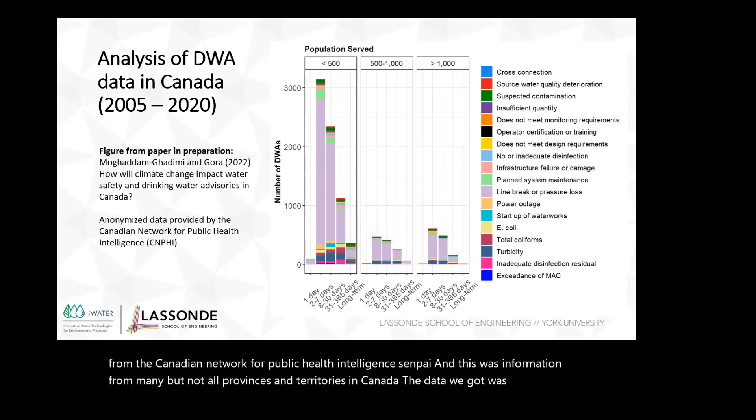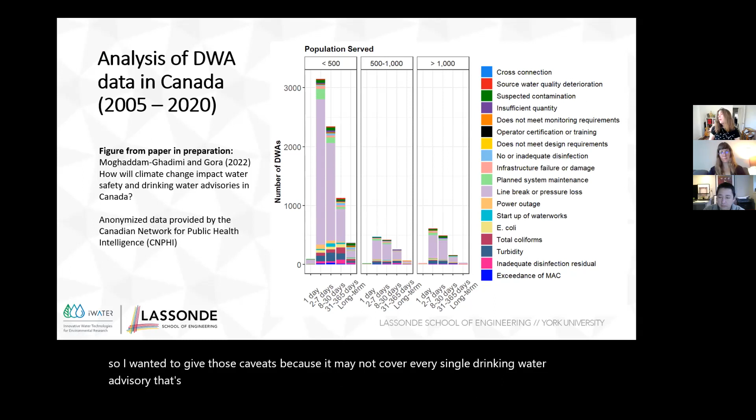So one of my students is working right now on a paper all about the different causes of boil water advisories in Canada. So we got some information from the Canadian Network for Public Health Intelligence, CNPHI, and this was information from many, but not all, provinces and territories in Canada. The data we got was anonymized, which means we don't actually know exactly what community it came from or even what region. So I wanted to give those caveats because it may not cover every single drinking water advisory in Canada. That said, we were able to find some really interesting trends.

So this complicated graph shows a few things. We've got a couple of different population ranges. We've got under 500, so very small. We have 500 to 1,000, which is still pretty small, and then greater than 1,000. And the reason we did this kind of breakdown at the bottom end is because we already knew that most drinking water advisories happen in small communities. We also broke it down along the x-axis here. We're looking at the length of the boil water advisories, right?

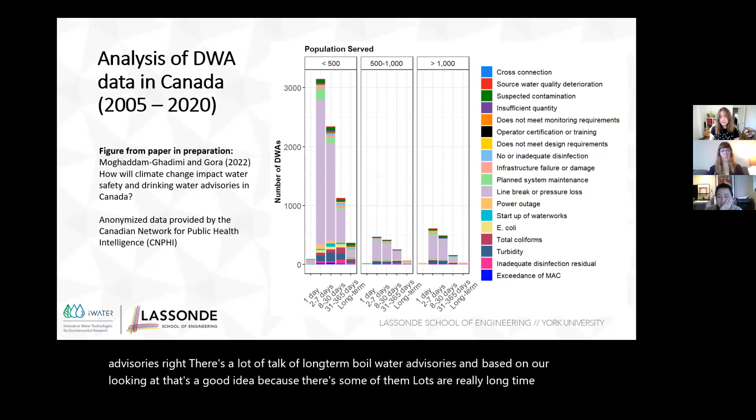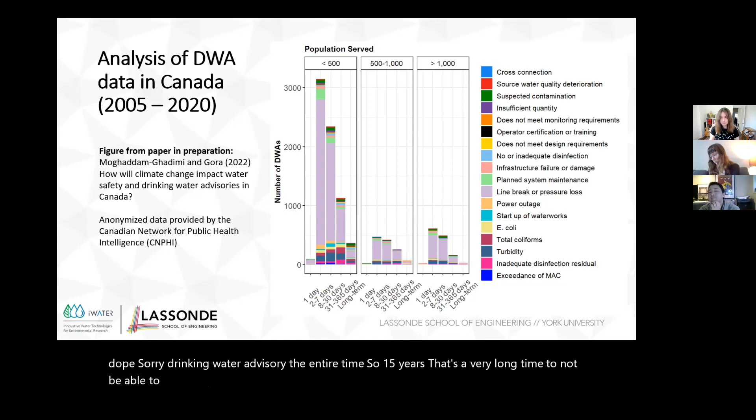There's a lot of talk of long-term boil water advisories, and based on our looking at it, that's a good idea because some of them last a really long time. We had a 15-year data set. We had some communities that were on a drinking water advisory the entire time. So 15 years, that's a very long time to not be able to drink your water without further treatment. Most of them, though, were somewhere between a week and a month, which is still incredibly long, especially if you've got children at home or if you're running a business. This is hugely disruptive.

So another thing that really stands out is if you look at this purple section here on these stacked bar graphs, this means line break or pressure loss. There are a couple of different reasons that can underlie that, but the main takeaway is that this is actually a distribution system issue. So it's not that there aren't boil water advisories related to bacteria being detected in the water. It's not that it's not because of operator training, because there certainly are a lot that are related to that. But a lot of what we're seeing is related to the distribution system infrastructure.

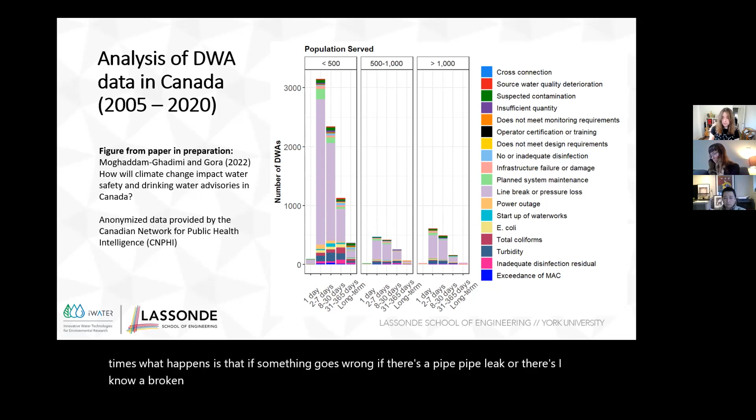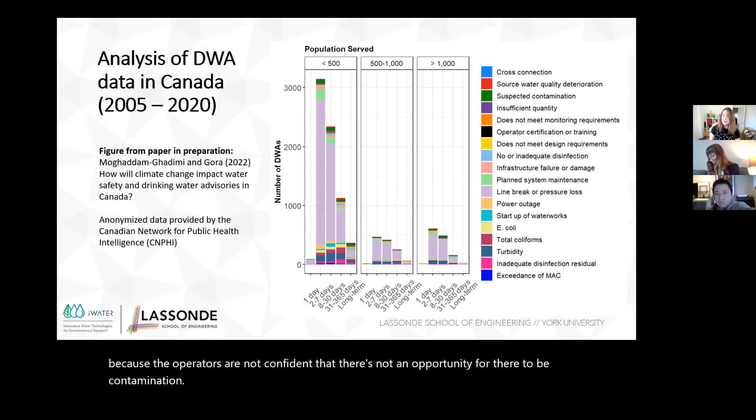And a lot of times what happens is that if something goes wrong, like if there's a pipe leak or there's a broken pipe, they'll put on a precautionary boil water advisory. So people are told to boil the water because the operators are not confident that there's not an opportunity for there to be contamination. This is useful information because if we really want to deal with what's happening here, if we really want to minimize the number of drinking water advisories, we need to know what is causing them.

So similarly, oh, no, I didn't put it up, sorry. Forgive me, I had another slide, but I didn't want to get too long.

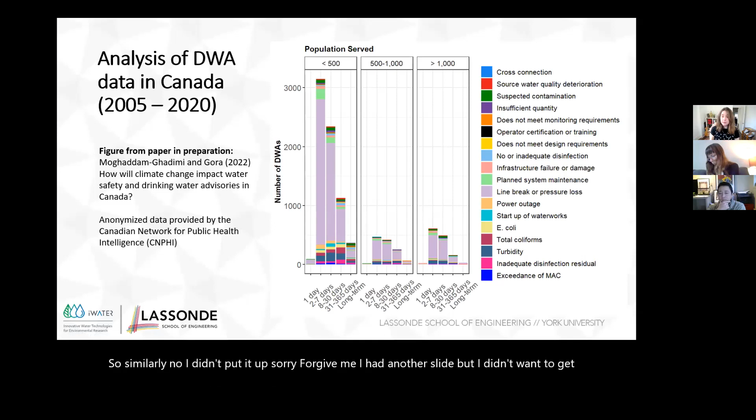We also looked at repeat boil water advisories and we had a very similar pattern. So again, issues in the distribution system were the main cause of drinking water advisories being called. And in most cases, those were precautionary, which means that it's not that something had been detected in the water, but that there was a risk of there being something detected in the water.

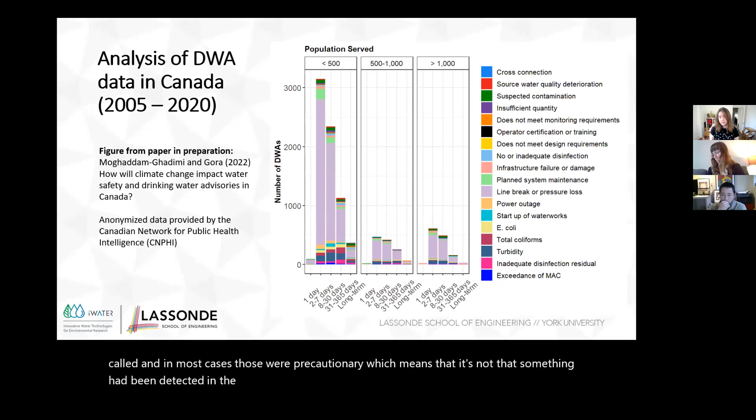Okay, so with that in mind, I want to tell you about two projects that I've worked on in the past and kind of how I went from somebody who didn't know a lot about drinking water in small communities. I'm from Hamilton, Ontario, which is about 500,000 people. So this is not something that was in my own personal background, but I've done a lot of work since I started as an engineer in these kinds of communities. And I think when I first started, all I saw were the challenges, but as time went on, I started to see the opportunities for innovation.

So the first one, when I worked in industry for 3 years a while ago, a lot of my work was related to small communities in Newfoundland and Labrador. So if you're not from Canada or you're not super familiar with Canada, Newfoundland and Labrador is our easternmost province. It has one of the smallest populations in Canada, and it's very rural.

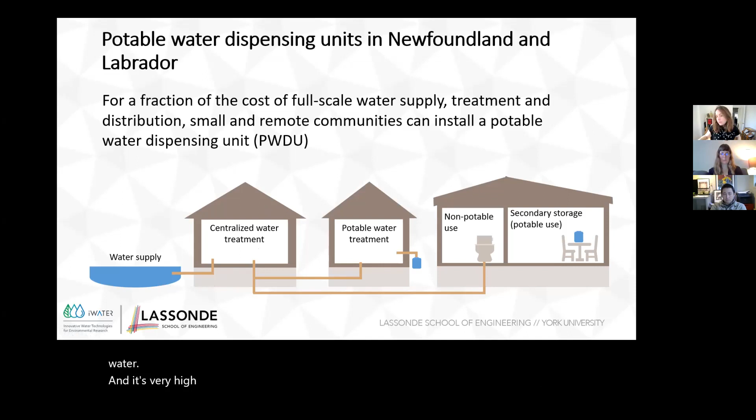I was lucky enough to work on this project throughout my time in industry. So it's one of the first things I did, and some of the follow-up projects were some of the last things I did while I was there. So what was neat about this is that it wasn't an idea that was imposed from above. This is something that came from the communities themselves, or at least a subset of them. So 7 communities built their own potable water dispensing units, usually at things like the town hall.

3 of them had ozonation for their treatment, and 4 of them used reverse osmosis membranes. The aesthetic water quality improved, so that there was no more taste or smell of chlorine. The types of treatments used meant that there was much less color in the water. So the aesthetic quality was much higher. We did a study looking at all 7 of these. We went to sample the water and to talk to people and figure out how people were using it.

And we found that the aesthetic water quality was a huge predictor of whether or not people would actually use this thing, which is, again, not too surprising. Aesthetic water quality is what gives all of us as users an indication as to whether or not the water is safe, right? We also found that what we called the quality of the dispensing experience was a huge predictor of whether or not people would use it.

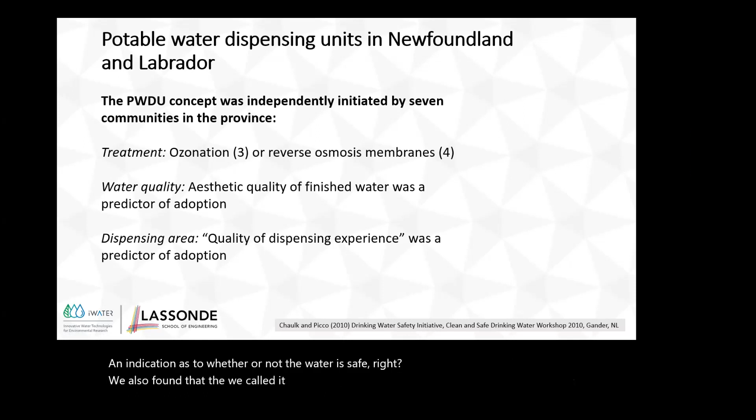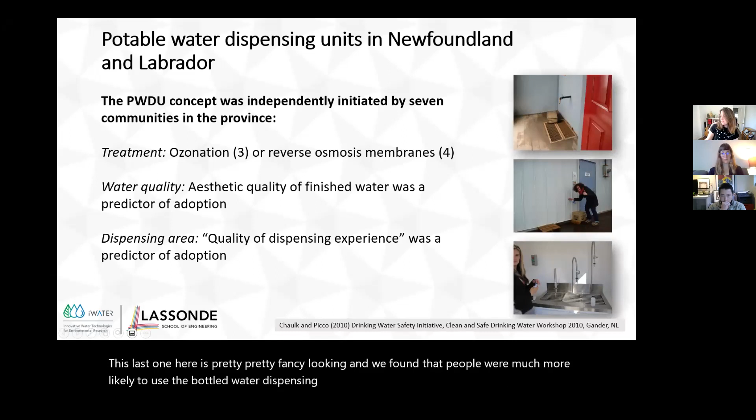So when I talk about innovation, we saw these things. It came from the ground up. And we were tasked as an engineering firm with designing something that would take into account what's already been done before in these 7 communities, and how could we improve it, standardize it so that it could be scaled up to many more communities in the province.

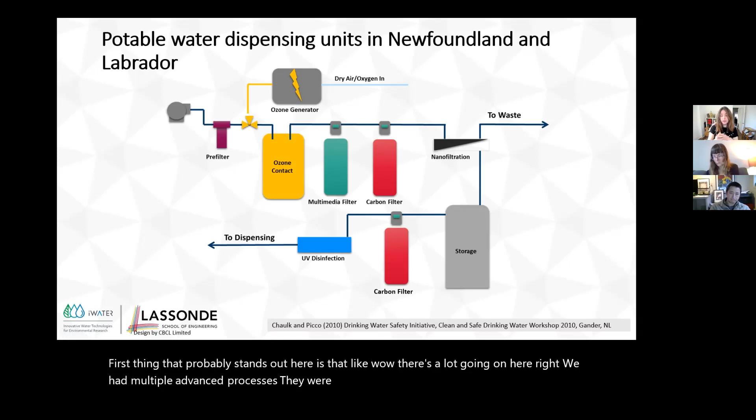So I won't go through this in too much detail, but it does show you the main components of this process. We have ozone, we have activated carbon, we have nanofiltration, we have UV. First thing that probably stands out here is that, wow, there's a lot going on here, right? We had multiple advanced processes. They were very small, which helped on the energy and chemical side, but still we had a lot going on. The goal here was that if one of these things broke down, it would still be possible.

There was kind of a natural redundancy built in so that the other stuff would keep working and still provide safe water. Two other things: we had this storage. We sized the storage so there would be at least 5 liters per person per day for the community.

And the UV disinfection: when the water came in, it would have had chlorine in it, but through all these different stages, it would have been removed, especially through the GAC. But we did provide UV disinfection right at the outlet. So after it came out of storage, right when someone's dispensing the water, it would go through a UV unit.

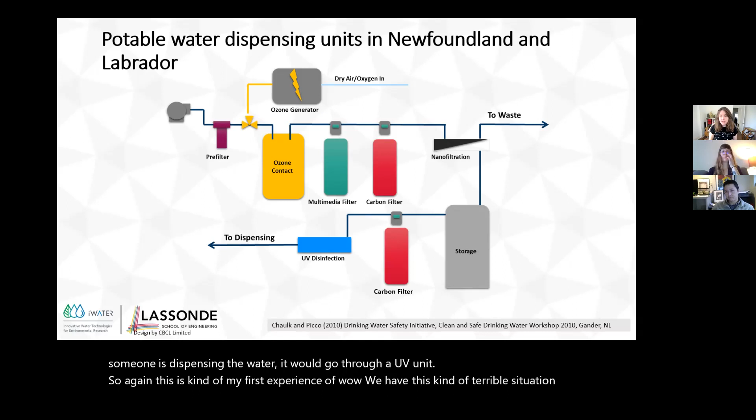So again, this is kind of my first experience of, wow, we have this kind of terrible situation. But the solution is kind of outside the box, right? Or I guess we're making a new box, but it's not what you'd expect, right? And that's kind of cool.

I don't want to say there's freedom, because that implies that maybe we're going to play fast and loose with water safety, and that's not really what it is. It's just that you might need to look outside the usual solutions, and there's maybe a certain kind of openness to trying new things that will work at the small scale.

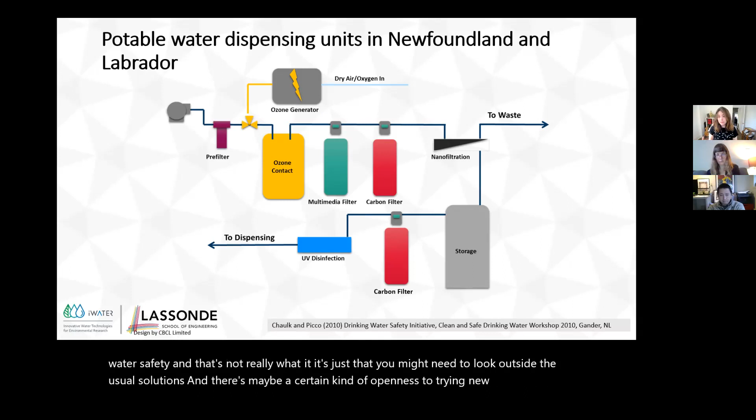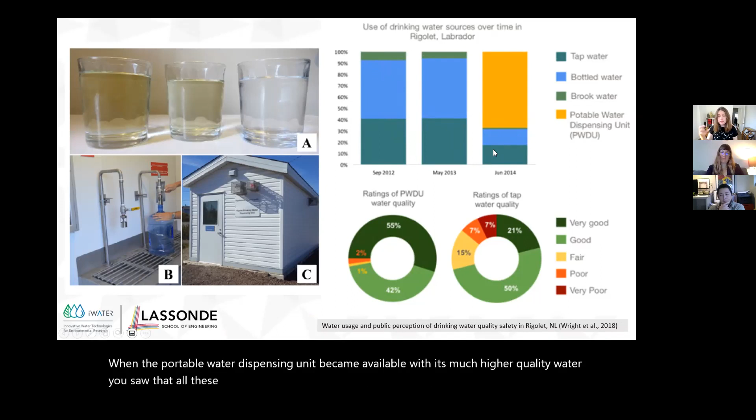And the one that really gives me heart is the bottled water, because bottled water is expensive and obviously causes a lot of plastic pollution. So this was a major positive in terms of people being able to turn from a very expensive source of water to something that was less expensive for them.

Okay, so the other case study or experience I'd like to relate for you is the work that I did during my postdoc. I was really lucky to be assigned this project. I was working in Halifax at Dalhousie University with Professor Graham Gagnon. And this was the project I was brought on to manage.

So Pond Inlet, or Mittimatalik, is a community on the northern tip, basically, of Baffin Island. My arrow might have moved slightly when I changed the formatting, but anyway, it's up there. And it's a beautiful, beautiful place. The community is, I think, about 1,500 people, I think 90% Inuit.

And the mountains here are Bylot Island, which is why I'm thinking my arrow might be a bit wrong, because it's this island right here, and it's just across the bay. It's a spectacularly beautiful place.

So like many places in the north, Pond Inlet has a trucked water system. So what this means is that instead of having pipes in the ground, they rely on a truck to deliver the water. Water comes in from the lake. It gets pumped and then as it's going through, there's some chlorine added and it goes into the truck. The truck drives around for 20 minutes for chlorine contact time. And then it delivers the water to tanks in people's homes and in other buildings.

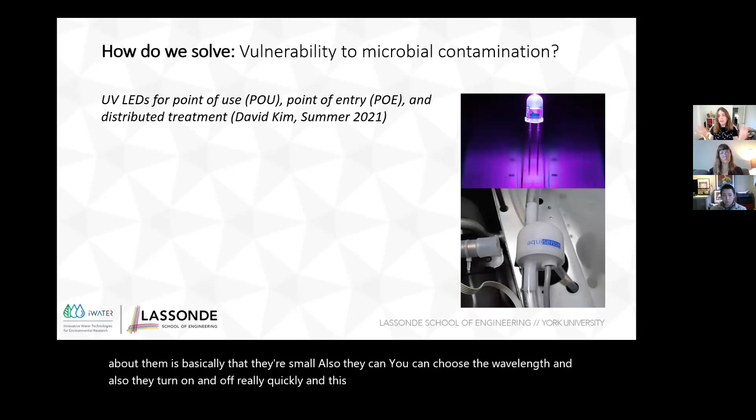So David's work, he reviewed a big pile of studies about what was going on with UV LEDs right now. He identified different vendors, reputable vendors, and there are quite a number of them. I have AquiSense's thing here, but only because I've worked with them, and so I was able to take a picture of their unit, but there are lots of different vendors who are working in this space.

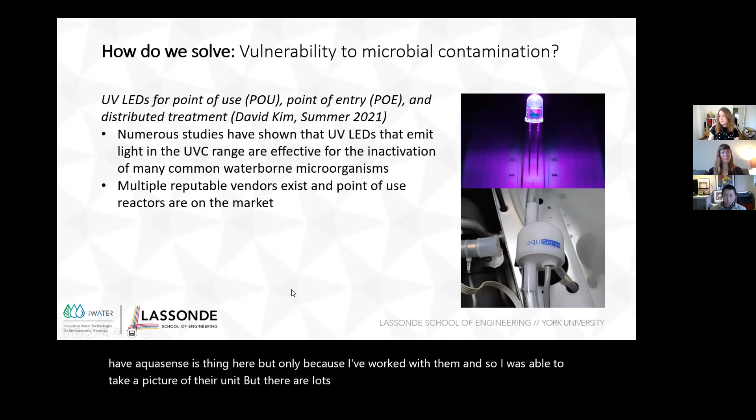So one of the coolest things that David did was he talked to a bunch of different industry experts. He talked to consulting engineers, he talked to regulators, he talked to people at the Walkerton Clean Water Centre, and he talked to manufacturers of UV LED reactors. And what he found was that there's a bit of a reluctance to adopt this kind of technology among people who are not right in the UV LED industry. And a lot of this is because there's not a lot of pilot data or real world installations, and people want to see that before they will basically sign on to this technology.

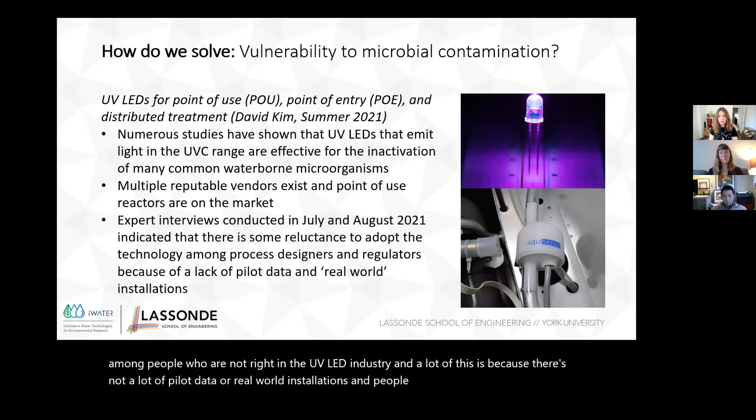So another thing that we've been looking at is, it's one thing to have a treatment, but how do we make sure that the water is always safe at the tap? So another thing that we're working on, this is my student Sarah's project, is a microfluidic sensor. In this case, she's looking at something that would be used in concert with a UV LED reactor in order to better understand or be able to calculate how much inactivation we'd be achieving, or how well the thing would be working. So this is another really cool high-tech potential solution to a problem that exists in many small communities, which is this vulnerability to microbial contamination.

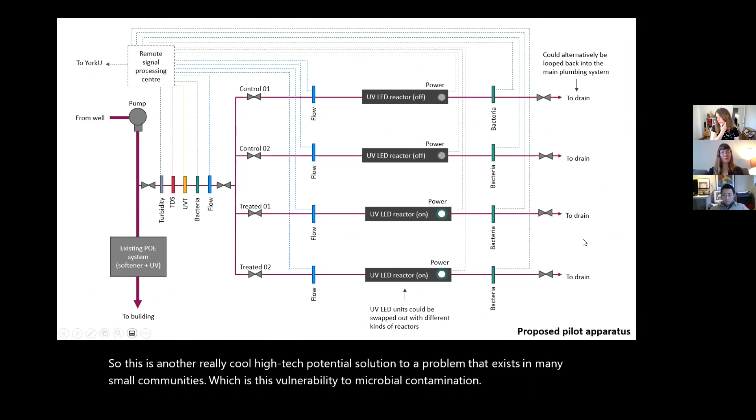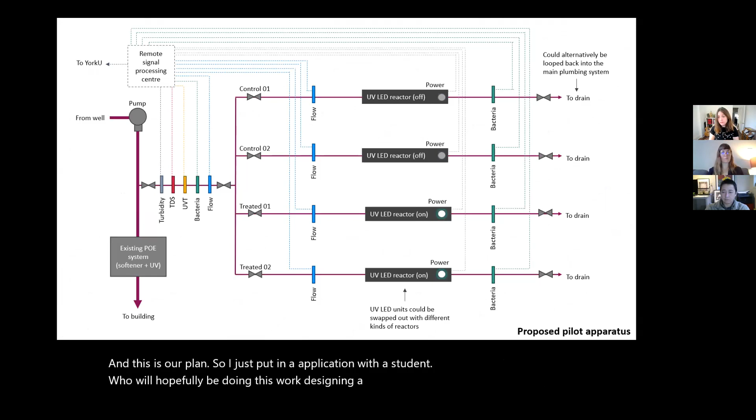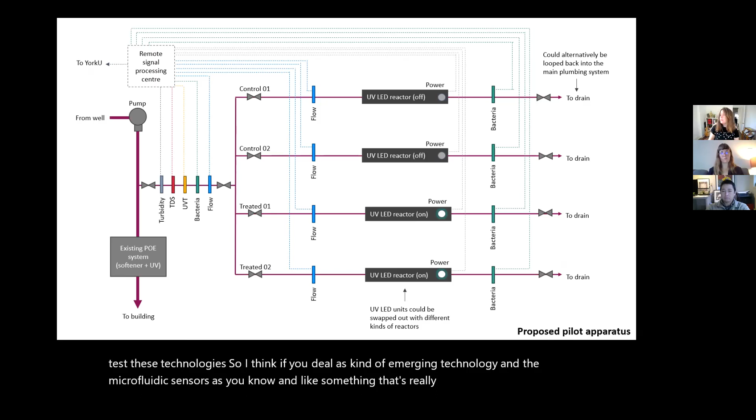And this is our plan. So I just put in an application with a student who will hopefully be doing this work, designing a pilot system that we can use to basically test these technologies. So I think of UV LEDs as kind of emerging technology, and the microfluidic sensors as something that's really novel. So the nice thing here is that we could test both of them on a skid, and the idea would be to have it so we could move it around and test it in different locations. So fingers crossed that student gets his scholarship and can come help with this.

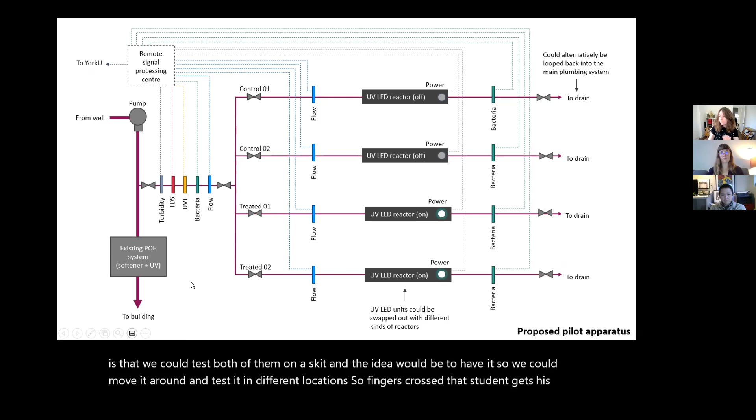All right, now how about the metals in drinking water, right? This was a major problem, and in my opinion, a bit of a scarier problem that we uncovered. So right now, what we found, I showed you a couple different things, right? I showed you a longer graph that had some really high lead levels, and I also showed you those smaller graphs that were the sequential sampling. One of the things we found when we were up in Pond Inlet was that it was very difficult to get samples that were really representative of the problem we were trying to understand. A lot of the sampling procedures that already exist are designed for cities, and not only for cities, but for systems that have a pipe distribution system.

So one of the things that we want to look at as a team is, can we develop better sampling methods that give us better information that we can use to understand these problems, so that we can then come up with interventions that would be more effective? So this summer, Kyle Baird, who's an undergraduate student, and Caroline Duncan, a PhD student, will be helping him out as part of her project. They're going to be looking at 3D printing a proportional sampling apparatus. And the idea here is that we could attach this to a tap, and it could take constant samples, which would really give us a lot of information about how much lead is coming out of taps, right? We're not relying necessarily on, I don't want to say, it is carefully thought out, but it's not like a set method.

This is trying to get just a better sense of overall what's going on. And then we're going to try to match it up with different existing sampling methods and see which one might be best for these kinds of systems. Also, I just started working with a new student, Shapur, as well as a professor in mechanical engineering, Pouya Rezai, and we will once again be looking at a microfluidic sensor, in this case for lead detection.

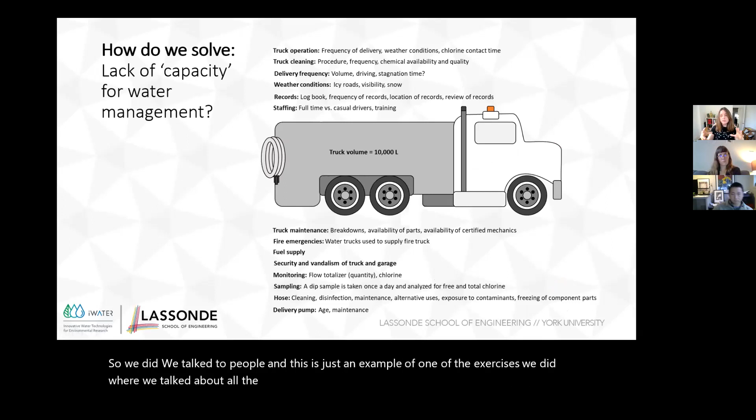So we talked to people, and this is just an example of one of the exercises we did where we talked about all the potential hazards surrounding this one area of risk, which was the delivery truck in Pond Inlet. It was the research team at Dalhousie as well as the research team in Pond Inlet, and we identified all these different things and talked about them in detail.

Later in the project, we didn't just limit it to our research team. We talked to people in the community as well as other stakeholders. So engineers who were working for the government, people working in public housing, who had a lot of influence on the water quality in different buildings. And we talked to them in their own language. They had the option to be interviewed in English or Inuktitut. And we got a lot of information about what they perceived as hazards in their water system, as well as ideas they had for addressing it.

So I think that water safety planning, or maybe something similar to it that's a bit less onerous, is not that new, but it's something that holds a lot of promise. It's kind of an innovative-ish approach to water management. In our space with this WASH type stuff, we've thought about water safety planning for a long time, but if you're working in industry, it doesn't really come up too much. It has been adopted to some degree in Alberta, but it's been converted into a very numerical type thing, so it doesn't really match the original intent of the WHO document.

So another thing, going down this road, it was great that we were able to, as a research group, and again, we were split between a community representative who was the local research manager and the research group at Dalhousie. We did some research that I would say is fairly inclusive, but the research team up north had already done some of their own research.